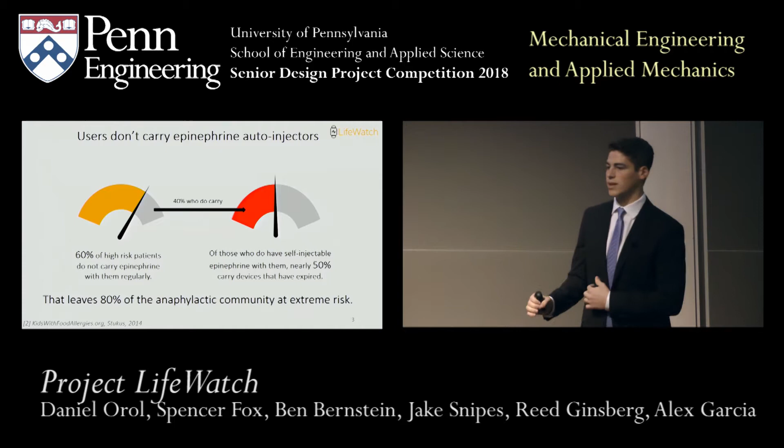In a study taken by the Kids With Food Allergies, they found that 60% of high-risk patients didn't carry their auto-injectors regularly. And out of the 40% who did, half of them were carrying expired epinephrine. That leaves 80% of the anaphylactic community at extremely high risk.

But it's not just kids, it's students, it's adults and teens as well. Dylan Hill, who was just 18 years old when he actively chose not to carry his EpiPen to dinner one night, as he didn't like the look and discomfort of carrying it in his skinny jeans. He didn't have his auto-injector when he needed it most.

If one of the previous stories didn't startle you, I hope one of the following statistics does. 1 in 50 Americans has anaphylactic allergies. 1 in 13 children suffers from allergies, and every 3 minutes someone goes to the hospital for this exact reason.

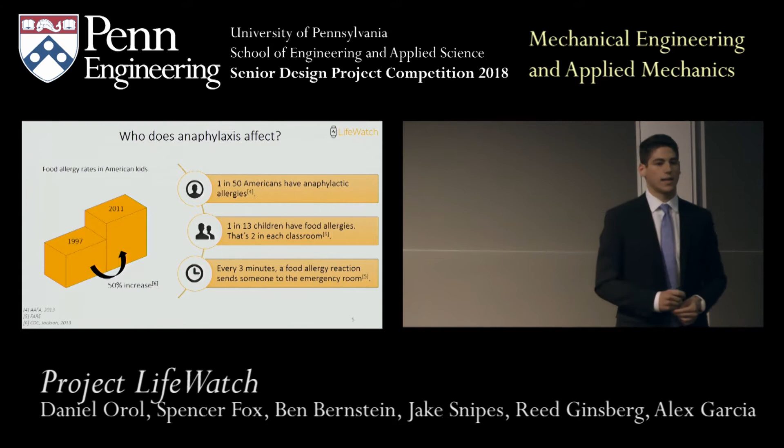Now, the number of children with anaphylactic allergies in the United States has been growing at a staggering pace. From 1997 to 2011, it increased by 50%, and it's continued to climb since. This is a serious problem, and the devastating truth is we lose lives to this disease every single year. I'm now going to hand it over to Alex, who will introduce you to some of our solutions. Thanks, Reed.

We started last fall by sending out a survey to 90 different auto-injector users to try to get a better understanding of our user base. They helped us identify 2 key metrics to use in evaluating potential solutions. These are the portability of the device and the burden that it places on the user in having to remember it on a daily basis.

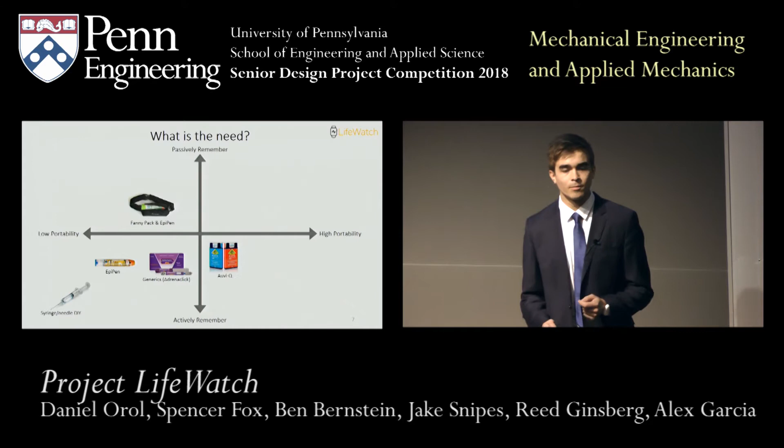We then evaluated the existing solutions, with the EpiPen scoring particularly poorly by both of these metrics. There has been improvement in the recent years with the introduction of the Auvi-Q into the marketplace, but we think there is room for further improvement. We then explored further into the design space, eventually settling on the watch profile. This design has allowed us to create a more passive relationship between the patient and their auto-injector.

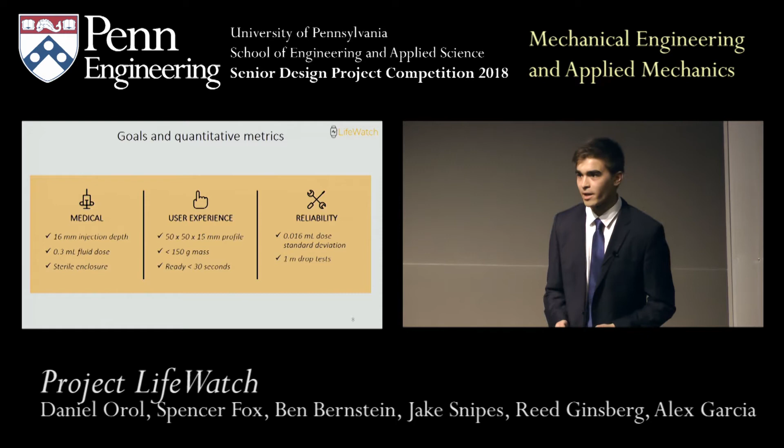The next step was to identify the key metrics we were going to use when creating this device. These are broken down into 3 categories, which are the medical, the user experience, and the reliability of the system. This has allowed us to create a device that is safe, comfortable, and robust. And now I'm going to hand it over to Ben, who's going to talk about our solution, the LifeWatch. Thanks, Alex.

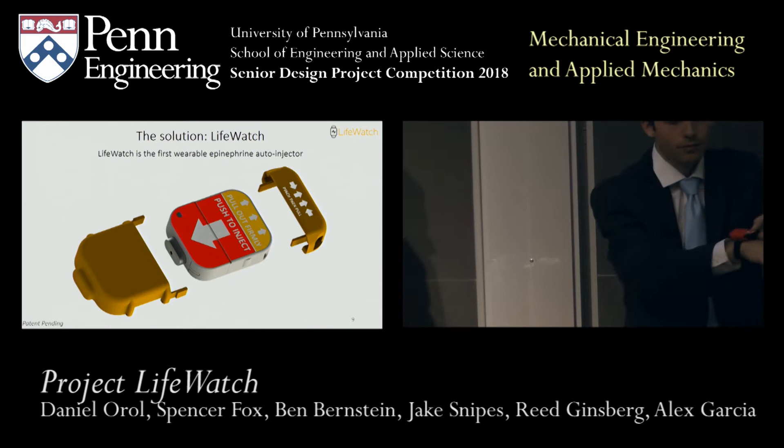LifeWatch is the first wearable epinephrine auto-injector for people with anaphylactic allergies. Jake has a device on his wrist right now without a needle, and he's going to show you just how it works. If a user needs to perform an injection, the first thing that they do is they take off the back safety cap. Next, they pull the device out of the outer case, and then they push it into their outer thigh. This triggers the injection.

Afterwards, they can cover the needle with this revolve lock that locks in front of the needle and protects the user. Let's take a look inside. The device has 5 main components. The first is the main body, which houses all of the other parts. Next is the syringe, which has the needle that gets driven into the user's thigh, as well as the medicine that's administered.

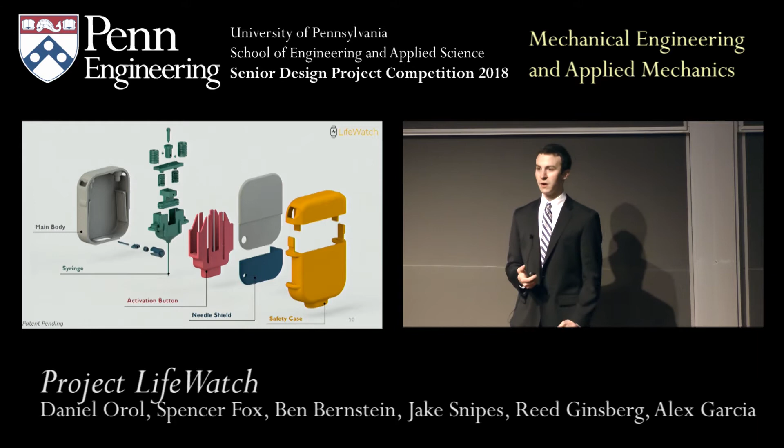After that is the activation button, which is pushed against the user's thigh and triggers the activation sequence. The needle shield, like I just said, covers the needle and shields the user after injection. And finally, the safety case holds the device on the user's wrist and protects it from potential damage. Let's see all of these parts working together.

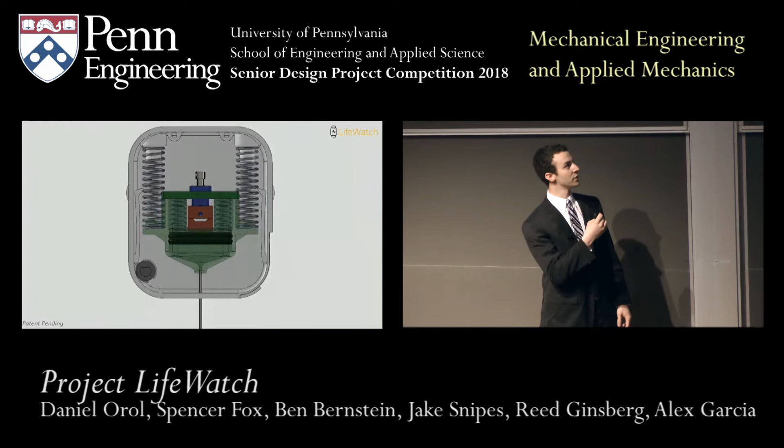First, the safety cap is removed and the device is pulled out of the case. Next, it's pushed against the outer thigh, which drives the activation button up. This releases 2 flexures and pushes them to the side, which allows the syringe to be driven down by 2 springs. This action further pulls a pin, which releases the plunger and pushes fluid out of the syringe. After the injection is complete, the needle cover is rotated over the needle to protect the user.

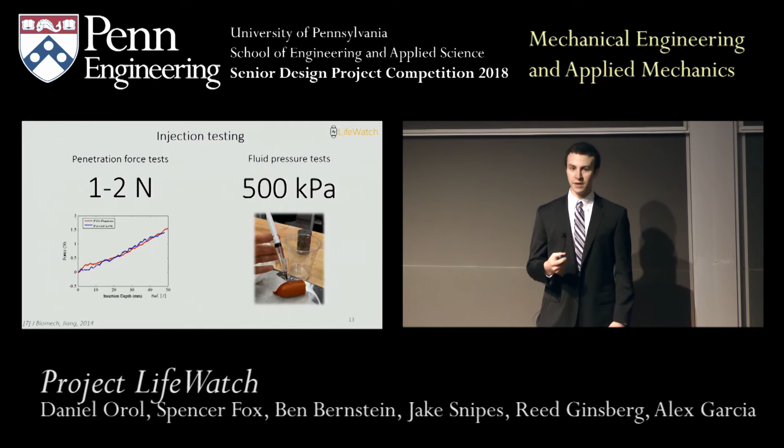We took a fairly iterative design approach with this device, and we'd like to share some of the decisions that we made along the way. One of the first things that we did was perform injection tests on human flesh analogs. We did this to find the required force to push a needle into the user's thigh, as well as the required fluid pressure to push fluid out of the syringe. And the values we got from these tests matched that of the literature.

Next, we wanted to confirm that the fluid flow profile through our custom syringe and needle geometry would match that of an EpiPen. To do this, we researched the EpiPen and found the outlet velocity of an EpiPen and compared that to a computational analysis of our device. And we found that the two outlet velocities were roughly the same.

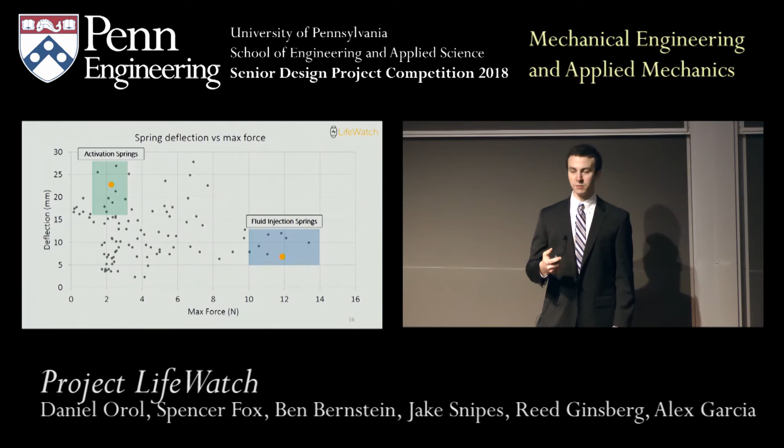We surveyed the options that were available on the market and plotted them on this force versus displacement graph. For activation, we need springs with very high deflection, and for injection, we need springs with low deflection but very high force. That limited us to the two regions that you can see here, and from there we were able to down select even further based on other parameters such as the outer diameter of the spring.

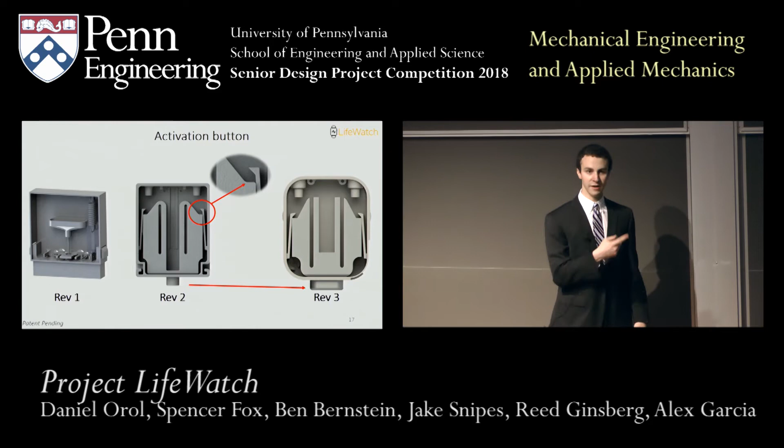For activation, we developed this flexure system whereby the activation button pushes up and deflects two flexures to the side and gives room for the syringe to be driven down. After testing, we realized we had to increase the contact area of the activation button on the bottom in order to ensure robustness and reliability.

Then, to make sure that this flexure system worked every single time, we wanted to perform a stress analysis using FEA on the system. We did that with the nominal spring force and found that the stress was significantly lower than the yield strength, meaning that this would work. I'll now pass it off to Daniel. He'll talk some more about some of the other components.

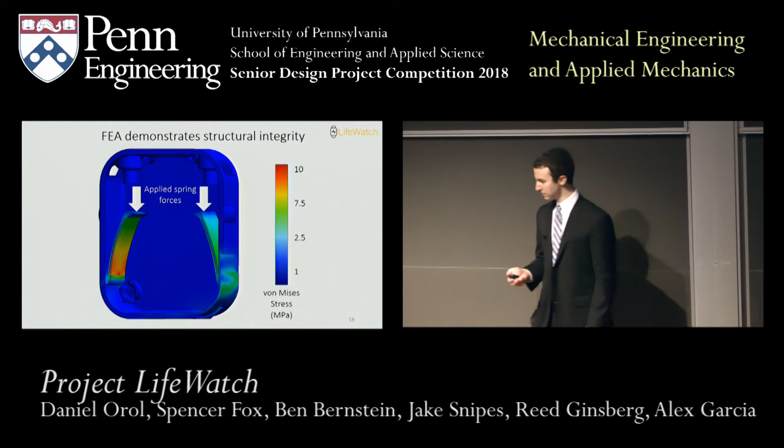Thanks, Ben. We spent a lot of time thinking about the user experience of our device. We started with an open-faced bottom, but that proved to be impractical for sterility concerns. So we transitioned to this closed-faced bottom with a buckle interface. And over a series of iterations, we've come to the final design that's extremely easy to use and interfaces directly with the safety caps, reducing our part count.

These springs act through a complex force chain, which is resolved as an effective frictional force keeping the pin in place. That's opposed by a string pulling up on the pin, and by analyzing this force system, we can optimize the taper angle theta. By changing the materials involved, we can reduce the resistive coefficients, and by changing all of the various geometric constraints, we can set a nominal required pull force that is well within available bounds, even accounting for standard manufacturing tolerances, indicating that we can pull the pin every single time.

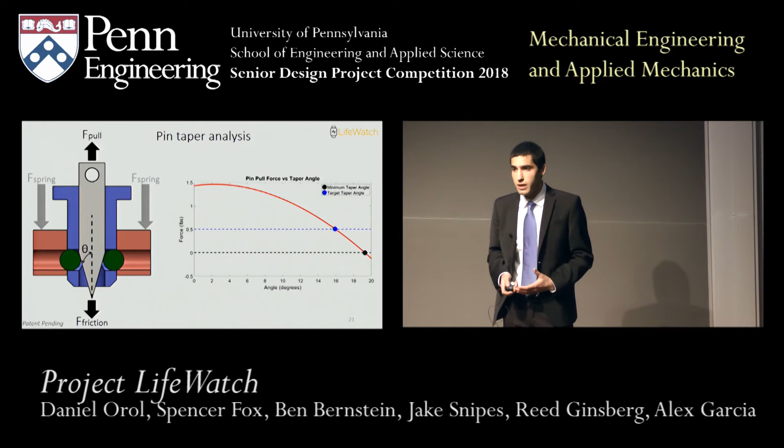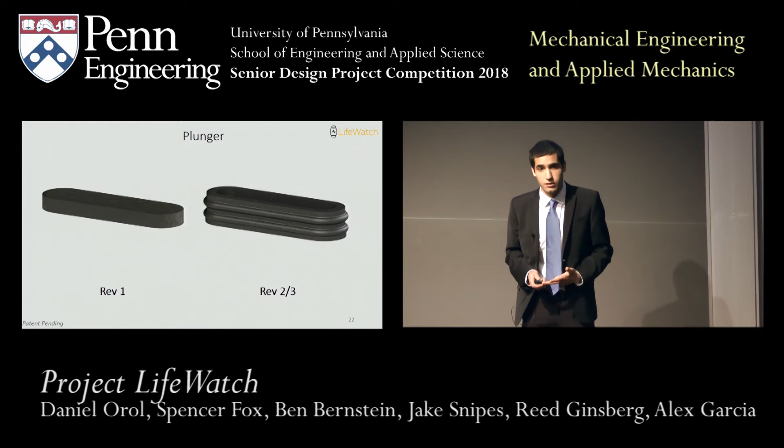But we also need to seal the fluid chamber itself. We started with a flat piece of rubber, which we thought would be a simple solution to this problem, until we started testing it. We realized that we need to look at industrial-grade syringe geometry, material overlap, and material hardness constraints, allowing us to have our custom seal be almost 100% effective.

And as a medical device, this needs to be completely safe. So before injection, the safety cap locks the activation flexures in place, preventing anything from moving. And after injection, the revolve sheath locks into place with a keyed slot mechanism, preventing any accidental needle pricks.

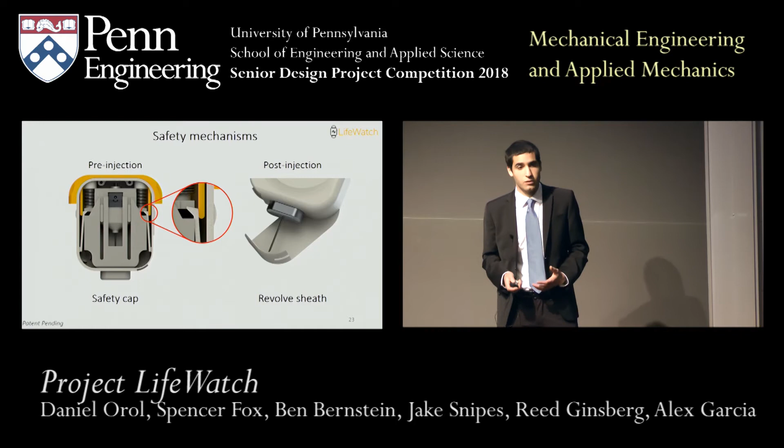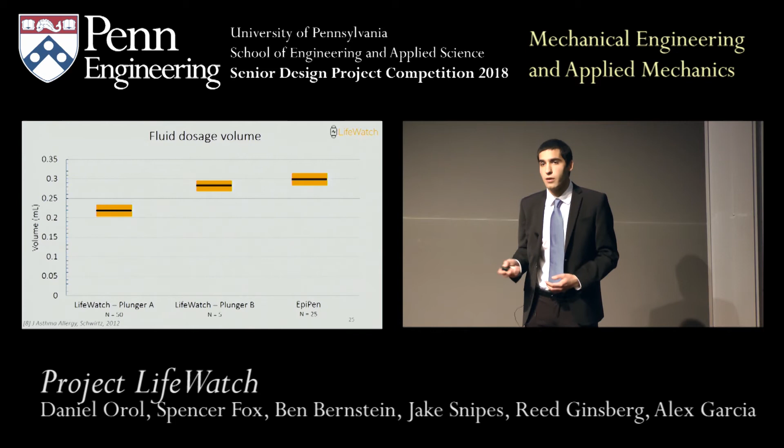So to combat that issue, we improved our manufacturing method with plunger B. That allowed us to increase the volume towards the target value without negatively affecting the standard deviation at all. This shows that with commercial manufacturing processes, we should be able to hit that target value. To validate the fluid flow analysis, we took a slow motion video of the full system working, extracting the distance and the time to get an outlet velocity that matched almost exactly the expected values.

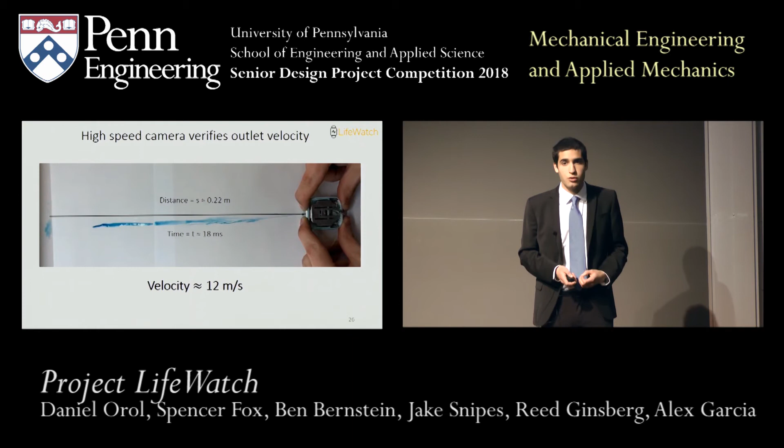Finally, as a user device, we need to make sure nothing bad happens if it's dropped or smacked on a table. So we conducted a series of 1 meter drop tests, both with and without the safety case, looking to make sure there were no early activations and no failures to activate after being dropped. With the safety cases on, we saw a 100% success rate.

Without the safety cases on, we saw similar results on all of the relevant faces, although we do see some early activations when dropped on the side without the case. This leaves us some room to improve, which we could do by stiffening the activation flexures themselves.

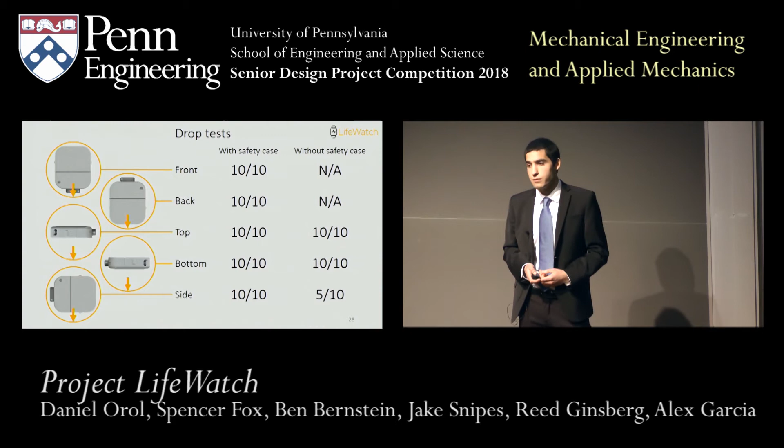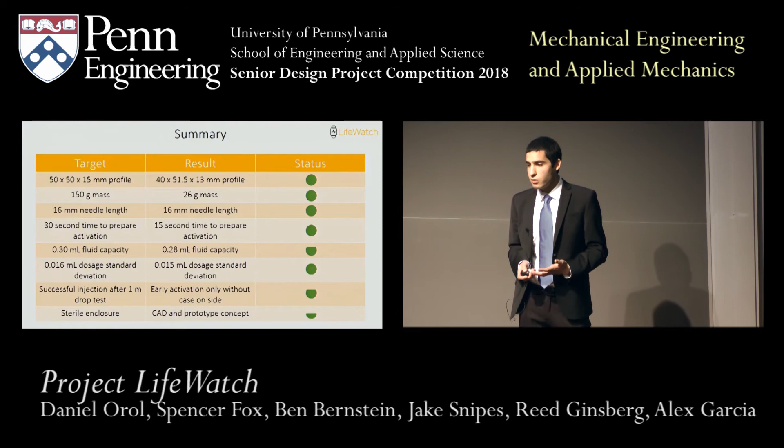In summary, we hit almost every single metric we set out to, including all of the user experience and reliability metrics, and most of the medical metrics. The remaining medical metrics we showed high design feasibility for.